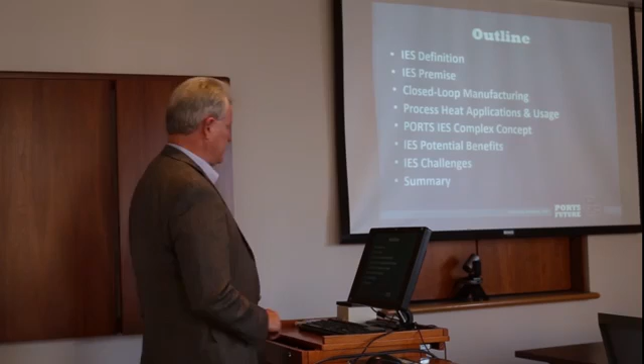So let's look first at what an integrated energy system is, because we always like to look at definitions. Here's the definition that DOE basically has, and you can see that's a fairly complex one.

It says 2 or more energy resources are utilized as inputs to 2 or more physically coupled subsystems to produce 1 or more energy commodities as outputs. As you can see, that's a little bit of a complicated technical definition.

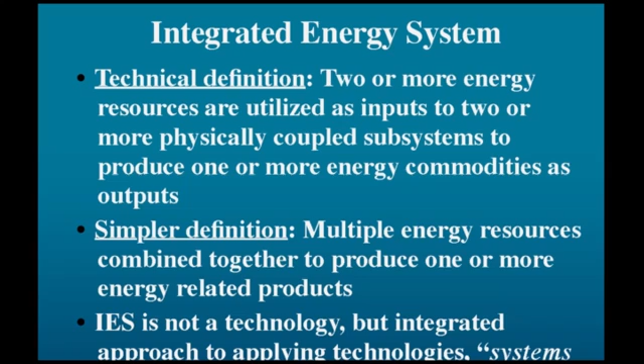A simpler definition is multiple energy resources combined together to produce 1 or more energy-related products. Now, an IES system is really not a technology, but an integrated approach to how you apply technologies. What I like to call it is a systems of systems approach to how you actually integrate systems together to form an integrated system, making it more efficient and cost-effective to use.

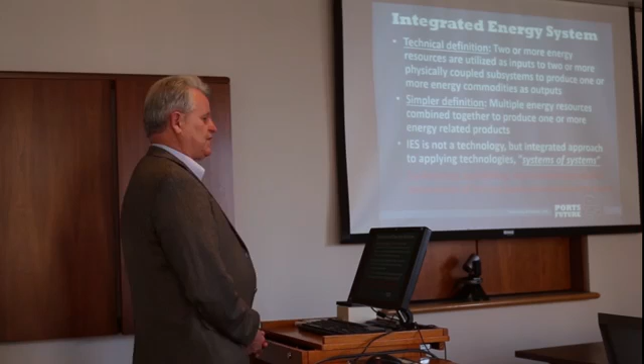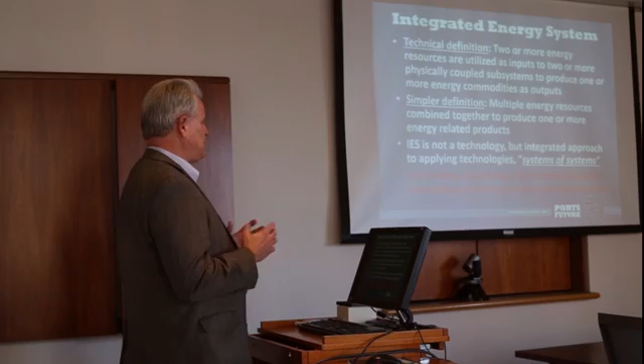But the definition I really like to work with the local community, for economic developers and other people, is to think about it as co-locating, combining, interconnecting, and networking energy producers with energy end users. We want to combine not just the energy producers, but the energy end users together, so you can cost-effectively integrate the energy producers but also tie them in with the energy users, where they're used together and integrated together.

Now, the IES system comes by a lot of other names. In the past, what technical people like to call it is cogeneration. You've probably heard this term. It's been around particularly since the mid-1970s, when the United States was in an energy crisis, and it became very popular to have cogeneration.

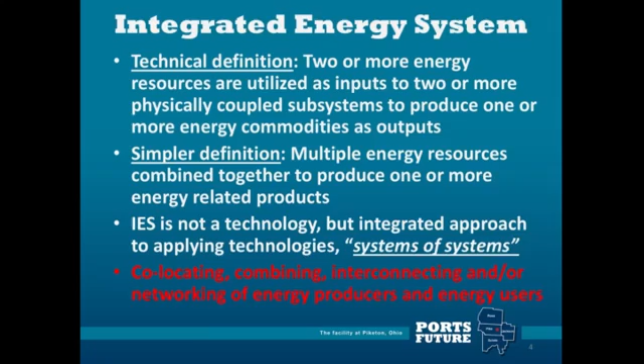Cogeneration is usually thought of as a single energy source producing 2 energy commodities. More recently it's used as combined heat and power, which you may see a lot in technical papers and newspapers. That's talking about where you have natural gas, coal, oil, or biomass to produce process heat, typically for a chemical process.

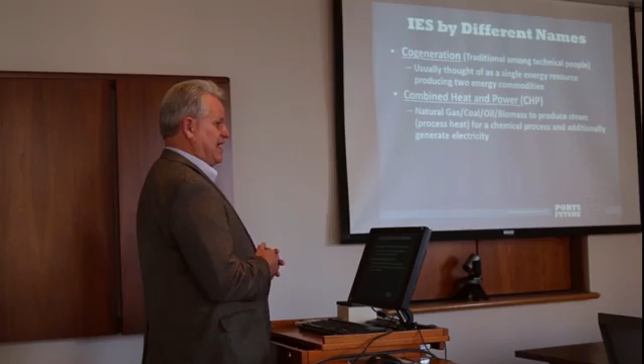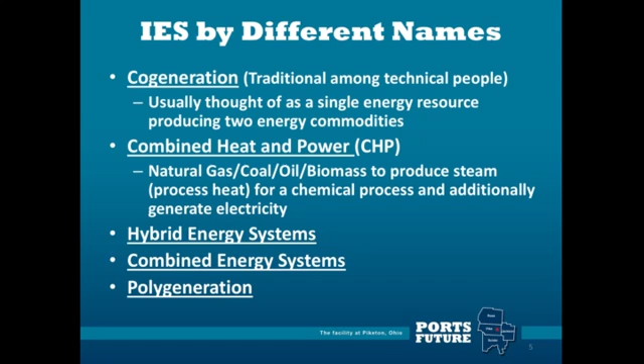And when you're making this heat for a chemical process, you say, well, I could use that heat for other purposes as well. So I can use the waste heat from my chemical process to generate electricity. Actually using process heat for chemical processes and also to generate electricity - that's what a lot of companies are doing. In Ohio here, Solvay Polymers and Kraton Polymers, that's exactly what they did over in Marietta, Ohio.

But now also, as we move forward, people look at what they call hybrid energy systems. Of course, hybrid energy systems you can probably relate most to a Toyota Prius or hybrid cars, where you have an internal combustion engine and an electrical motor that also drives the wheels. So you have a combination of both electrical and internal combustion engine to actually drive the vehicle.

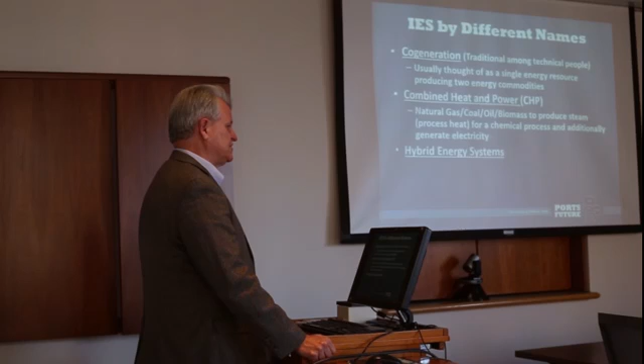That's another definition to have, but still most people, when they think of hybrid systems, just like on the Prius, think of combining just 2 systems together, even though in the definition of hybrid energy system, it can actually be multiple systems tied together.

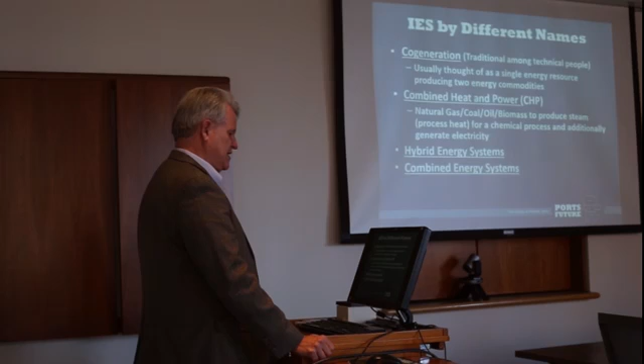The more recent term people are starting to use now is combined energy systems. Combined energy systems was coined by a guy at MIT, Dr. Forsberg, and that term really sort of defines exactly what it is - combining energy systems and integrating them together.

But I like the definition that they use. The Chinese use one called polygeneration. If you look at a lot of literature about hybrid energy systems or combined energy systems, you'll see where a lot of researchers from China have used the word polygeneration, and I personally like that term very well.

Now, what's the premise or the basis behind an integrated energy system? Well, it's that the whole is worth more than the parts. What does that mean? Take the word synergy—it comes from the systems approach. That's where sometimes you hear say 2 + 2 = 4, but this is where they say 2 + 2 = 5. Because working together, being integrated together, the whole is a lot bigger than the parts that make it up.

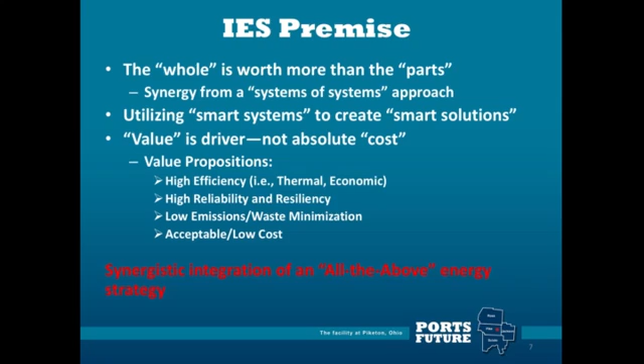And then, of course, again, we mentioned before about the cost. Most people want to shoot for the lowest cost, and that seems to be what drives people. But sometimes you want acceptable costs—like, for instance, if you want a better environment, you may have to pay a little bit more. So maybe if you pay just slightly more, you can adjust the system. It might cost a little more, but you're going to reap the benefits of having it be much better for the environment. You can pick whatever value proposition, and then adjust the system based on that because it's all working together.

But now the definition I really want you to remember for this, what we call the ports integration complex that we want to put over Portsmouth, is really just fundamentally the synergistic integration of all the above energy strategy. About everybody has agreed, from a political standpoint from both parties, that about everybody believes we should be using an all-of-the-above energy approach.

However, an all-of-the-above energy approach, when it's not working together, can be detrimental. If you're just going to depend on just wind, just solar, just hydro, just nuclear, just coal, or natural gas, having just a single approach is not going to get you the effective system you need. The idea is to synergistically integrate all of the above that are economically available for the region. So the definition I want you to look at is that the IES is a synergistic integration of an all-of-the-above strategy.

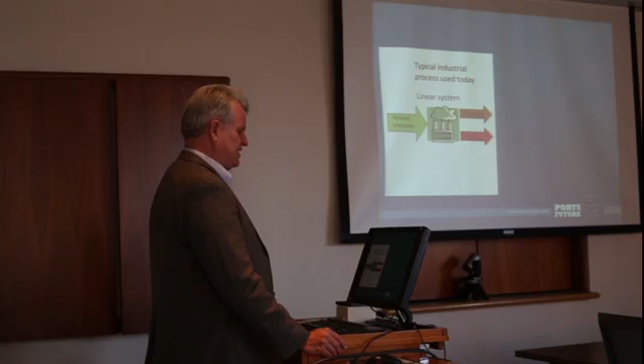Now let's look at how industry is done today. Industry today does what I call a linear system. You bring natural resources into the factory, you make products, and part of those products is waste, because that's the product you don't sell, that's the product that's not going to make you money, that's the part you just dispose of. That's basically how almost all of our industry is set up here in the United States, be it a power plant or any type of chemical or production factory: you bring in resources, you make a product, and you throw away waste. That's a very linear type system.

What we want to move towards is a more circular system, where you're actually bringing in the waste from one product to go into the next plant to make another product. So you may be producing a product, but you have a byproduct that you normally would throw away as waste. You actually take that waste, and it becomes a feedstock, or a material, and you add maybe some additional natural resources, and you make other value-added products that are marketable and that you can sell. The idea is to daisy chain these together in a circular fashion to where there is virtually no waste. The goal is to have zero waste from all this.

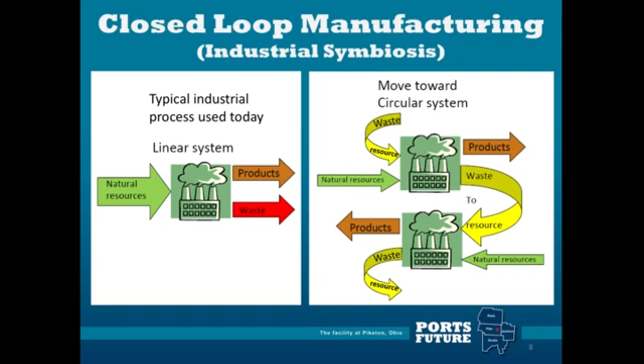This is what's called closed loop manufacturing. For some of the more technical people, the fancy term for this is industrial symbiosis. This is getting industries to actually work together to minimize the environmental impact they have, but also, from their perspective, to maximize their profit and their income.

Now, one other thing we look to do with the integrated energy system is better utilize the process heat, by looking at process heat applications. Here's an example of a list of applications you can do at various different temperature levels. Starting in the upper right-hand corner, that's the 800 to 1,000 degrees C range, where you can make hydrogen from water through water splitting—water is H2O, so you can split the hydrogen from the oxygen atoms and generate hydrogen that way.

The way most hydrogen is generated today is what's called steam methane reforming—that's the second level. That's how hydrogen is made today at about all of our refineries and by anybody making hydrogen. They're converting natural gas and reforming it to split off the hydrogen atoms. Cogeneration of electricity and steam is done between the 350 to 800 degree temperatures. Then you see other processes as you step down, like petroleum refinery, and also water purification and ethanol concentration facilities, more down in the 80 to 200 degree range.

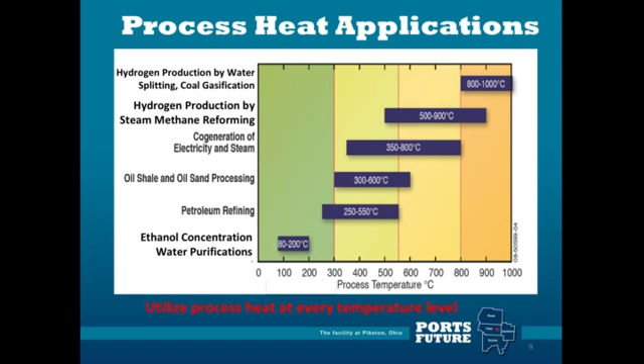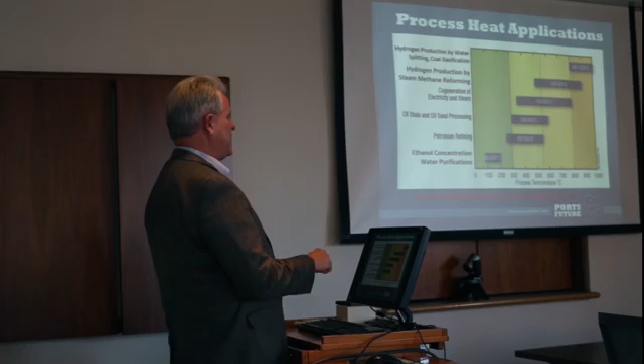But the idea is we want to utilize the heat at each one of these steps, because once you utilize the heat—say if you're exhausting at 800 degrees—you can go down to the next level and use that heat there. As that process heat, that working fluid, cools down, you could go down to the next level and utilize it there. Right now, power plants are built with cooling towers to cool the process heat fluid down. We want to instead use that process heat by co-locating another manufacturing facility or process there to utilize that heat, basically all the way back down to ambient temperatures.

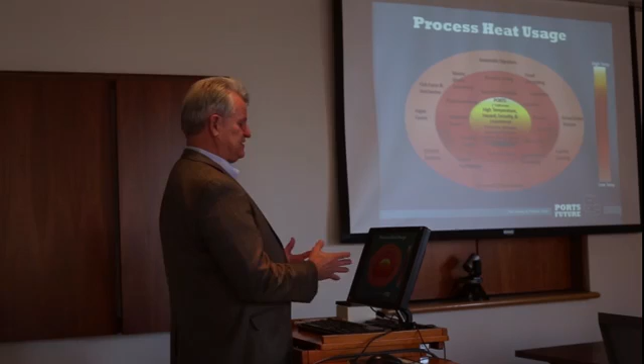As you utilize the temperatures, the waste heat from that facility would go to the next layer out, and it would help drive those chemical facilities and processing facilities. That's the next layer out. And then so on and so forth till you go all the way out to the outer side.

You go out here to the lower temperatures, probably closer to around 80 degrees C or less, and that's where you can do anaerobic digestion. You could use district heating for the facilities and buildings that you have there. I think one of the unique ones is to have grow houses and greenhouses.

Grow houses would be a great area to grow food indoors. You hear a lot about vertical farming these days, to be able to grow indoors. Here in Ohio it gets cold in the wintertime, and we need to have the heat to be able to grow year-round. There's also going to be fish hatcheries.

The goal here is to actually use the heat that's generated at every level, all the way out till it comes basically back to atmospheric temperature. So there's a lot of different products and processes that can be done by utilizing the heat. By co-locating these facilities in concentric circles, going out from the center being the hottest to the outside being the coolest, you're able to use that heat at all different levels.

Instead of having cooling towers and sending water vapor up into the atmosphere, we want to utilize that temperature to make some kind of value product.

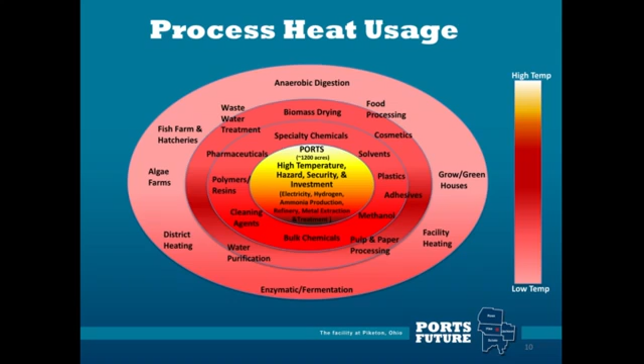So what does the Ports IES complex look like? Here's sort of an overall graphic. You see from the upper left-hand corner, you can actually bring in natural gas, which we're co-located here by the

Marcellus Shale, the Utica Shale, which is one of the largest gas reserves in the world. From what I understand, the Marcellus Shale is the largest gas reserve in the world. And you'd be able to bring that gas, or biomass, or municipal solid waste from our various cities, like Columbus or Cleveland, other major cities. Also, chipped tires can be used for a heat source.

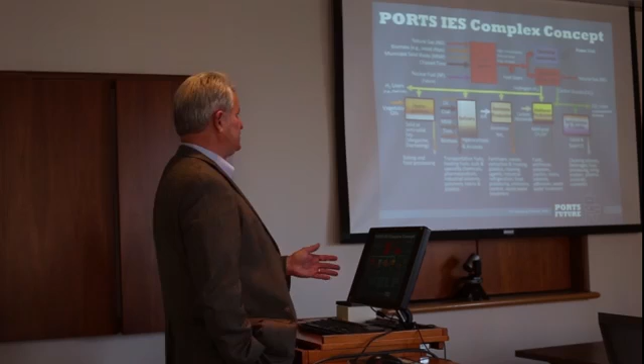At some point in the future, if we have advanced nuclear reactors, whatever the next generation reactors that come out, they could also be the heat source. Anyway, you take a heat source and then you make process heat, and that's typically steam. It doesn't have to be steam, it could be a molten salt, or other working fluids, as we like to say technically.

But let's just say this is steam for now. You can make electricity that would go power the grid. And then you can also make hydrogen. What's unique about making hydrogen is you can make it, like I said, from steam methane reforming. This diagram shows initially, because that's how it's done today, taking natural gas to make hydrogen. And once you make hydrogen, there's all kinds of products that you can make from it.

As you can see here, you can make methanol, you can make ammonia, you can use it in a refinery to hydrogenate hydrocarbons to make gasolines and fuels and alcohols. You can also use that hydrogen in foods to make vegetable oils like your margarines and shortening. And of course, there's a lot of other reasons you can use hydrogen. People are talking about fuel cells. You can provide hydrogen to fuel cells as well.

But as you can see down this list, there's a lot of different products that can be made from these fundamentals, that comes originally just by having hydrogen, because hydrogen is a very important element in the manufacturing of so many different products.

As you get hydrogen production from the steam methane reformer, you also produce CO2. A lot of people talk about CO2 going back to the atmosphere, but the concept we want is to actually recycle that CO2 and use it to make other products, like carbonic acid for beverages such as Coca-Cola, or other chemical products, repurposing that CO2 instead of letting it go to the atmosphere.

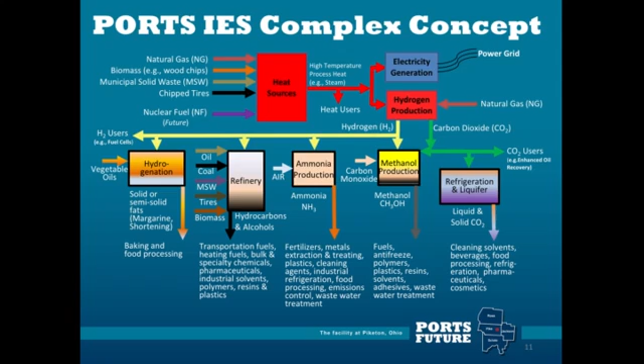Now, what are the potential benefits of an IES? One key thing is that it's really effective resource management. That's what we should all be doing - how do we most effectively use the resources we have? Industries often focus on profit or cost savings, but it's really about how we can be most effective with the resources available, giving us the highest overall energy usage efficiency.

Engineers typically think of that as thermal efficiency - how you can be most thermal efficient. It could also be how we can be most cost effective or most environmentally efficient. Another benefit is better utilization of capital equipment and lower operating expenses. If systems are integrated together, they can share a lot of things that lower that cost.

And how is that done? Through shared resources - you can share infrastructure, buildings and facilities, pipelines, personnel, maintenance crews, administrative personnel. There are a lot of things that if you co-locate facilities together, you can actually integrate the resources that you use.

You can also integrate the processes themselves, and this is very key, especially ones that have common processes. Like if you have a biomass refinery, a natural gas refinery, or an oil refinery, and you're making gasoline, heating fuel, jet fuel, or some kind of lubricant - it may start off as a different carbon feedstock, but it all ends up being the same product.

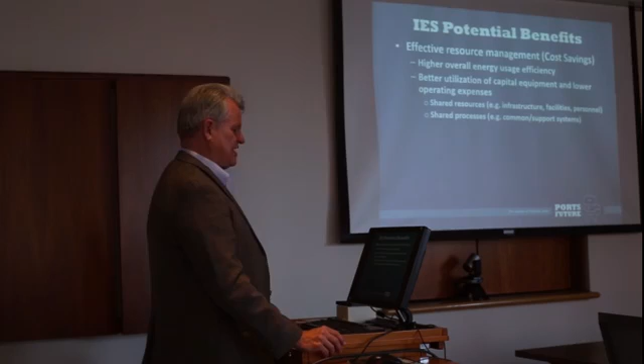Somewhere along the line, it becomes common to what it takes to produce it the rest of the way out - even the pipeline that carries it to its final destination or takes it away from the factory is common, so you don't have to build it separately. As I mentioned earlier, in the linear system each company builds its own system. Here, they'd actually share the common processes and reduce their cost by sharing these processes together.

One key benefit here too is reduced emissions, particularly of CO2. By having these facilities co-located, just the transportation between them and other activities lets us really save a lot on CO2. And as we move more to a circular economy, the waste product of one plant becomes the feedstock of the next plant. Ideally, we want enough plants in place where virtually there's no waste coming out the tail end.

The key is, as you know, we import a lot of oil in the United States - most people don't know we still import 10.1 million barrels per day. We need to use more of our domestic resources like natural gas and biomass here in the United States to make our products. Integrated energy systems allow us to do this with a more cost-effective approach. But with the low price of oil, it inhibits doing natural gas or biomass conversion, because it typically needs about a $70 per barrel cost. With oil now below $70, it's difficult for these other companies to compete with petroleum.

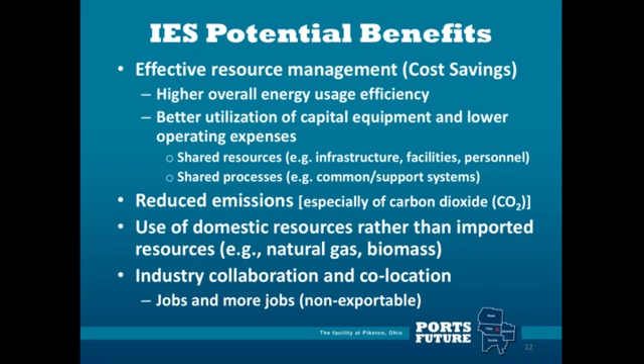And also, really what's the benefit is industry collaboration and co-location. What's very important in the IES system is getting people working together, and by being located together, this helps create jobs and more jobs.

Also, when you start making products that are not only wanted but needed, like energy products, we have to have them. We need jet fuel to fly our airplanes, fuels to drive our cars, and electricity to run our computers, other systems, and manufacturing facilities. When you have those co-located together, that means those jobs will not be moved somewhere else.

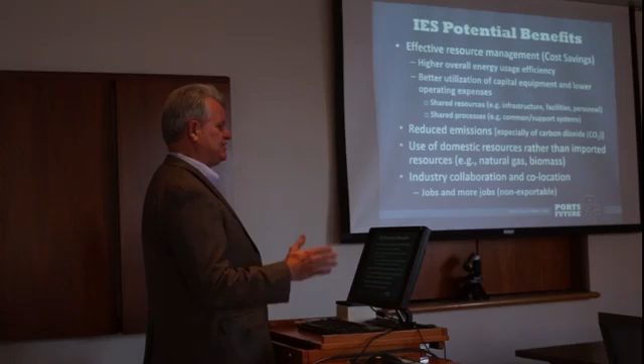We cannot generate electricity here and sell it somewhere else, just like China cannot sell its electricity elsewhere. It has to be built and manufactured right here. So the more things we actually produce right here, close by, especially in the Piketon area, the more we create what's called non-exportable jobs.

Now, what are some of the challenges faced on the IES? As I hinted before, you've got to have co-location of industries. You've got to have multiple organizations actually working together, which means they have to plan together how they're going to do this. They can't just suddenly decide they want to go build something real quick—they have to plan out what it's going to take.

I always like to remind people, if you want systems to be organized and integrated together, you first must get people to be able to integrate together. So you've got to get the people of these various industries talking to each other, so they can discuss it from a policy and business standpoint, and then let their engineers work out how best to integrate these systems to be cost effective and achieve whatever value propositions they've agreed upon.

Of course, as you might guess, if you start locating these large types of facilities together, there's a very large capital investment—we're talking projects in the billions of dollars. We're not talking a few hundred million dollars for these types of projects; they're billion-dollar class facilities.

And when you bring a lot of large capital investment together, you start talking about investment protection. You want to locate these facilities somewhere secure. That's one of the reasons the Piketon site, the port site over in Piketon, is a very good site—it's already set up with very high security systems. So from an investment protection standpoint, people who've invested a lot of money want to make sure those systems are going to be very secure.

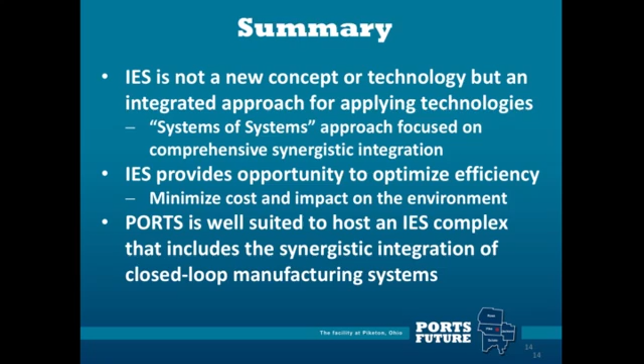But also it's an opportunity, as mentioned before, to actually optimize efficiency. And of course that means, from a corporation standpoint, to help minimize their cost, and from an environmental standpoint, it's help minimize the impact.

And I just want to say, particularly, the PORTS site is very well suited to host an IES complex, to especially have a synergistic integration combined in with closed-loop manufacturing, not just to produce energy there. That site used a lot of electricity, has a very high electrical grid at that site. But it's also going to be able to produce energy where it actually puts electricity back on the grid at that site, but also co-locate the other manufacturers there that can take the natural resources from the region.

Be able to utilize those and do that in a daisy chain fashion, closed loop system, be able to produce the maximum amount of products and create the maximum amount of jobs for the region.

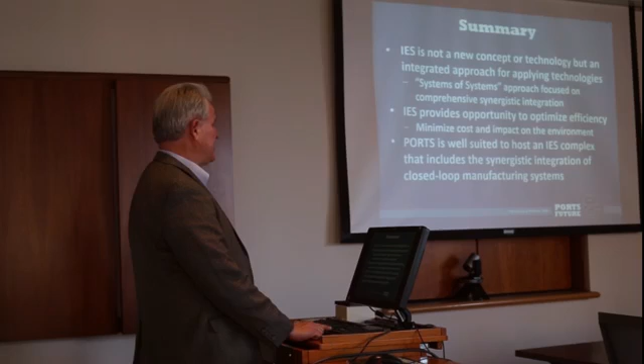Obviously a facility like this will have a major impact on the port site itself, just like when the port site was created by the Department of Energy back in the 1950s to be a gaseous diffusion site to enrich uranium. This will have a lot of industries located, and so they'll be the center or the hub of where the main activities take place.

But we think this can have a major impact not only on the state of Ohio, obviously through increased tax revenues and businesses that can be created here, but also utilize the resources in the Appalachian area that we've been blessed with here that typically are moved away from here, that we want to add the value here.

We want to take the natural gas and actually make products here with it, just like we also want to be able to repurpose coal and make other manufactured products out of utilizing coal and out of wood products. Take the products that are here in Appalachia, and we really want to give people hope here in the Appalachian area to be able to move forward.

And of course, from a national perspective, this is a U.S. government site. We want to convert this site from being now a federal liability, where roughly $1 million a day is being spent, to where it can be a facility where multi-million dollars a day of income can be made, which would create a lot of jobs and put people to work.